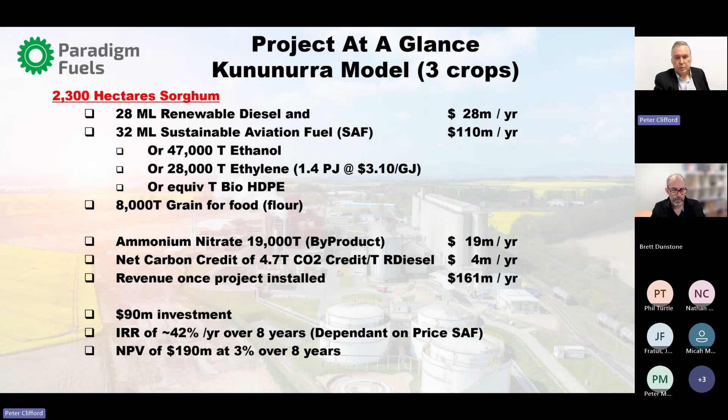Okay, to start the discussion on our technology, I first wanted to address the circularity of the system. First is the input into the system, which is the sorghum feedstock, having captured about 120 tonnes of carbon dioxide per hectare, a number that is based on molar balance calculations. And then there's the outputs, which are the ethanol products: ethylene, high-density polyethylene, sustainable aviation fuel, and/or renewable diesel. And then there's lipid oil products such as renewable diesel and sustainable aviation fuel, and digestion products such as nitrogen-rich digestate, which we bury below the crop, and ammonium nitrate fertiliser.

Now, the main process trains are the ethanol production, the lipid oil production, and the nitric acid production. I'll talk about these and other components such as the anaerobic digestion and power generation, and we'll reference this particular drawing. We'll keep coming back to this. But the main point is that no gases escape from this system. All carbon dioxide is captured, so as a minimum we have a carbon net zero operation.

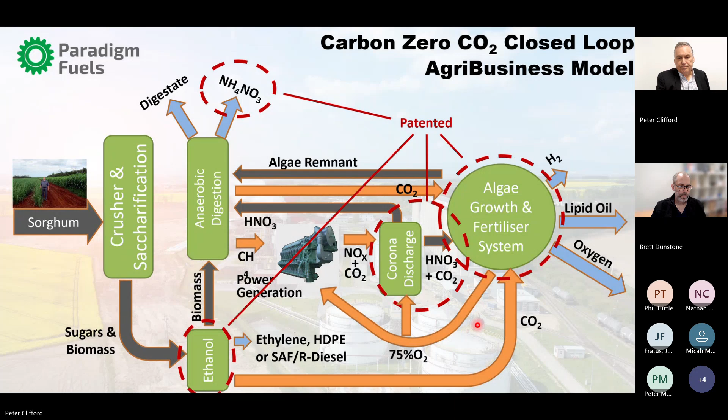But it's better than that. See, this diagram describes the one input and the three outputs of the process. The input is from the crop and the outputs into the ethanol product, in this case bio-HDPE, renewable diesel, and a digestate, which is then buried below the crop. The digestate is used as a feedstock for carbon farming and for the accumulation of Australian carbon credit units. In fact, 1/3 of the carbon that we capture from the sky ends up being buried below our sorghum crop.

The ethanol train can produce sustainable aviation fuel, as distinct from HDPE, which is slated as carbon net zero. But better still is that we require hundreds of thousands of tonnes of bio-HDPE for the construction of our algae growth system to produce large quantities of renewable diesel, but this also can be used to produce sustainable aviation fuel. And so there are two separate processes within our system that can be used to produce sustainable aviation fuel.

The 32 megalitres that I quoted in a previous slide is just from the ethanol train, but can be substantially more, 26 megalitres more, making the total SAF production 58 megalitres if we were to change the process parameters to produce SAF rather than renewable diesel through the hydrotreating process. Similarly, by extending the alkalization parameters, we can produce renewable diesel from the ethanol train.

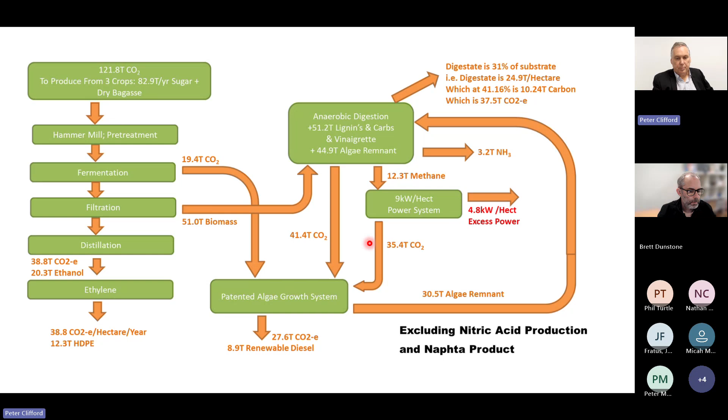So let's start talking about the components of the system. Our first process is the production of ethanol, going back to that drawing. Now, this is not new, but what is new is that we are using nitric acid generated within the system as a hydrolysis agent that upon completion of pre-treatment is then neutralized with ammonia to produce ammonium nitrate salt, which is later used as a fertiliser.

What we have is a hydrolysis process, which means we break apart the constituents of the biomass. In other words, we pre-treat the biomass to convert the starches to sugars, expose the hemicellulose and separate the cellulose from the lignins. So this we do in trenches, using much the same construction as our algae growth system, which I'll describe later.

But because of the significant throughput, about 1,000 tonnes per day, which includes a lot of water, and the fact that the entire pre-treatment and saccharification process is staggered over 6 days means that we require a lot of storage. So rather than utilising tanks, it is more affordable to use a variation of our algae system, being a trench, and all made from bio-HDPE, a product of our ethanol train.

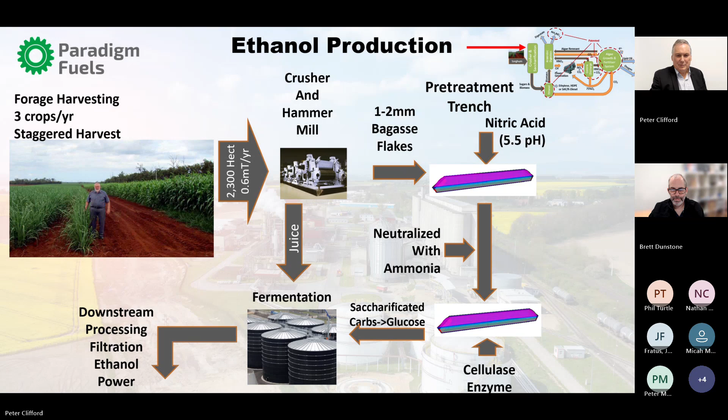Now, the anaerobic digester is a key component, and that's just there on that drawing, producing 4 useful products used within the system. There's the biomethane for gas engine power generation. There's the carbon dioxide, which is in abundance, and we use as an algae feedstock. There's ammonia for fertiliser, and there's the digestate, which is buried below the crop and sequestered for carbon credit.

For 2,300 hectares of crop, the anaerobic digester processes about 185,000 tonnes a year of biomass. And of that, there's 57,000 tonnes of cellulose, 49,000 tonnes of lignins, there's 11,000 tonnes of filtration remnant, but there's 68,000 tonnes of algae remnant, which contains more than 70% carbohydrate and protein. In fact, the protein alone will be about 70%. And then there is 10% nitrogen, and this remnant sits in a nitrate soup, a total of 185,000 tonnes per year of high quality feedstock to our anaerobic digester.

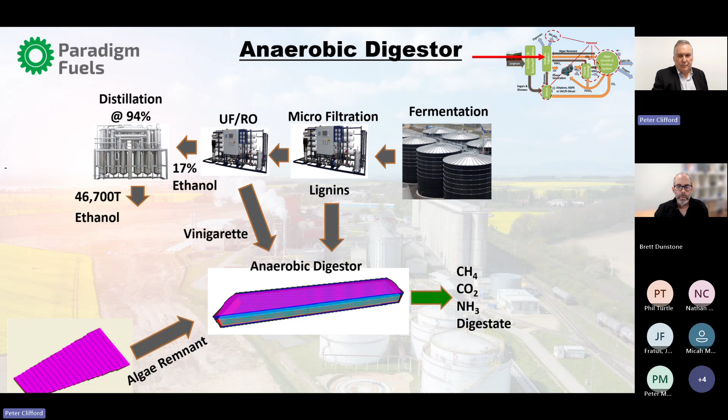Okay, one of the keys to affordably produce biofuel is to produce internally our own electrical power. Now, our process consumes 15 megawatts of power, and we have 16 megawatts of excess power available for other purposes. And at $100 per megawatt hour, the 2025 annual average wholesale price for New South Wales was $103 per megawatt hour, that is $13 million per year, which is 35 cents a litre for ethanol on top of other production costs. Now, we don't have to account for that 35 cents a litre because we are producing our own power.

If you were to compare against the old processes that don't include pre-treatment and saccharification, and which produce far less ethanol, then that power cost will be far greater than the 35 cents a litre. So whilst on the subject of cost saving, it is the production of our own fertiliser, which for sweet sorghum, our high biomass crop, having 2 to 3 times more biomass than that of sugarcane, is a significant cost.

So Sugar Research Australia examined the application of 140 kilograms of nitrogen per hectare near Mackay to produce 130 tonnes of sugarcane per hectare, and at $1,100 per tonne of urea and prorated by biomass, it's about another 4 cents a litre of ethanol in the cost to produce that product. And it can be much higher depending on a multitude of parameters. So I'll talk about our fertiliser production method shortly. And also we're producing twice as much power as we need, which allows us to consider desalination of water to enable 3 crops per year.

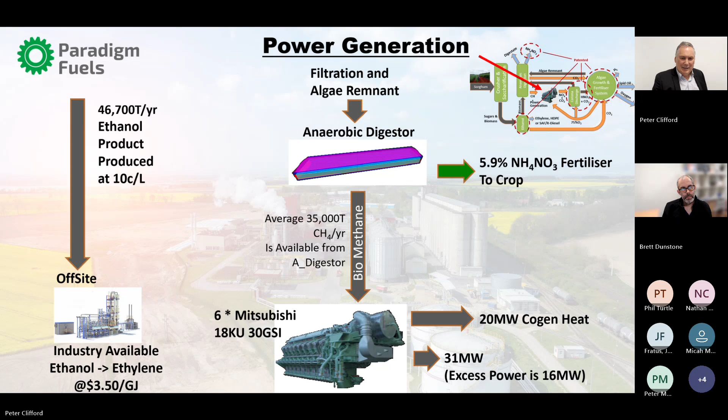And one thing our process does allow for is the constant feed of biomass material to the anaerobic digester, enabled by staggered harvesting. Better said, continuous harvesting, and a crop that only takes 120 days to grow. Though I haven't shown the accumulated gas flow generation, it is pretty much a straight line, meaning methane delivery to our gas generators is steady flow. That is very useful when considering production method and provides us with a range of production efficiencies when applied to other production components.

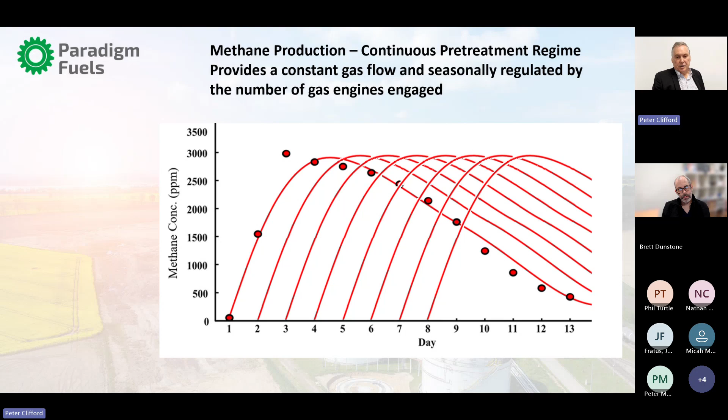The second process train is our algae growth system. And I mentioned earlier, we capture all carbon dioxide generated within the system. And for a 2,300 hectare crop, there's 58,000 tonnes of carbon dioxide produced by the fermentation process. There's 82,000 tonnes a year of carbon dioxide produced by the gas engine generators.

There's 95,000 tonnes of carbon dioxide produced by the anaerobic digester, and there's 31,000 tonnes a year of carbon dioxide produced by this NOx generator. In all, 266,000 tonnes a year of carbon dioxide, all fed into the algae growth system as its feedstock.

And we also produce 58,000 tonnes a year of nitric acid. A lot of that nitric acid is consumed by the algae, which is 7% by weight nitrogen. I mean, nitric acid is HNO3, H being the proton and NO3 being the nitrate. So it's the simplest form of nitrate.

Okay, so what happens as a result of this is that we end up with a high concentration of nitrogen in the feed of algae remnant to the anaerobic digester as digestible waste, which is a large portion of the digester's feedstock. So we fertilise this algae with nitric acid to obtain a pH of 5.5 to 6.5, in other words, mildly acidic, which also provides just enough stress to the algae to increase the lipid oil production.

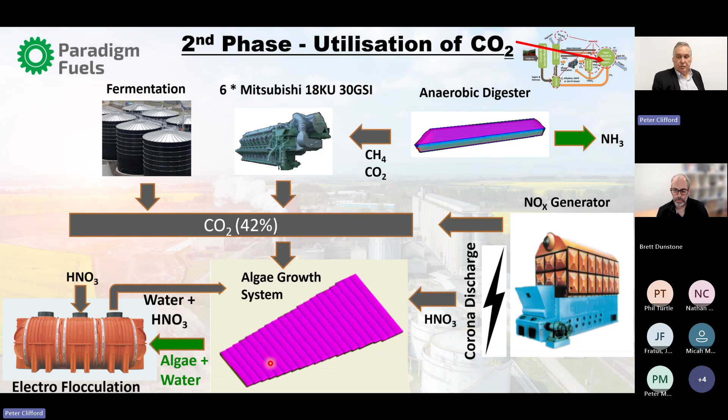So very shortly, I'll describe this algae growth system, which is the centerpiece of our second process train, the production of renewable diesel. But first, an explanation of our nitric acid production train. This is a cross-section of a furnace containing pressurized ducts. This furnace and the internal ducts are about 15 meters long, and the gases in the ducts contain a high concentration of oxygen, given that the algae growth system consumes carbon dioxide to produce a high concentration of oxygen, which we tap into.

So we mix that with air, which is 80% nitrogen. And so we have a high concentration of oxygen and nitrogen gas heated under pressure to generate NOx. Now, NOx describes a family of nitrogen oxides, NO, N2O, NO2, N2O3, N2O4, N2O5, but predominantly NO, one atom of nitrogen and one atom of oxygen. According to Bowman's theory, there's an estimation of the amount of nitrogen oxide that's generated as a function of time at the higher reaction temperature and at a concentration and pressure of the oxygen and nitrogen.

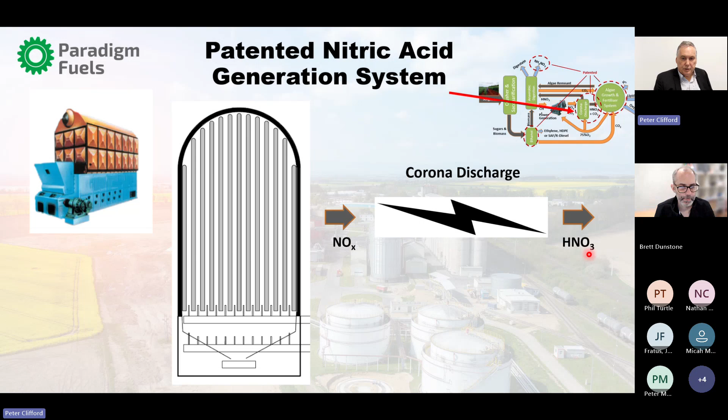We then saturate the NOx gases with water mist and pass them through a corona discharge device, which is a high voltage device that effectively ionizes the gases, much the same way as you would see around transmission lines on a misty night. The NOx converts to nitrous acid, and a benefit of its short half-life is that we end up with nitric acid. So we can produce the 58,000 tonnes of nitric acid per year that I mentioned in the previous slide.

And before I discuss the algae growth system, I should also mention that biodiesel is not renewable diesel. Biodiesel is a fatty acid methyl ester, which is not warranted for straight-up use by major engine manufacturers. But renewable diesel is warranted and is a paraffin, a very different type of fuel. So lipid oils are extracted from the algae, and they are processed into renewable diesel using hydrogen processing technology. It's called hydrotreating, and is widely used in oil refineries. So we can produce renewable diesel at around about 22 cents a litre Australian.

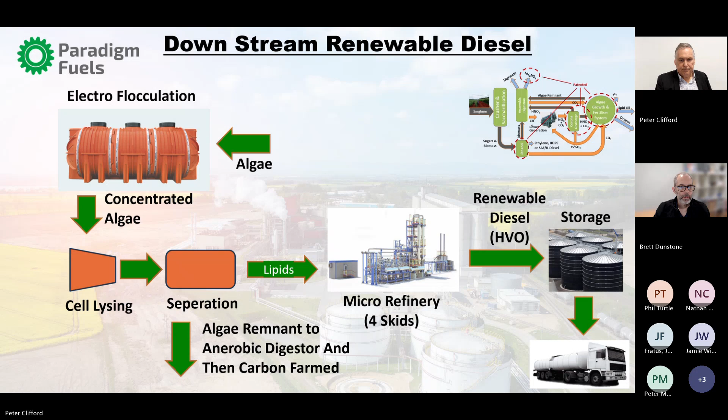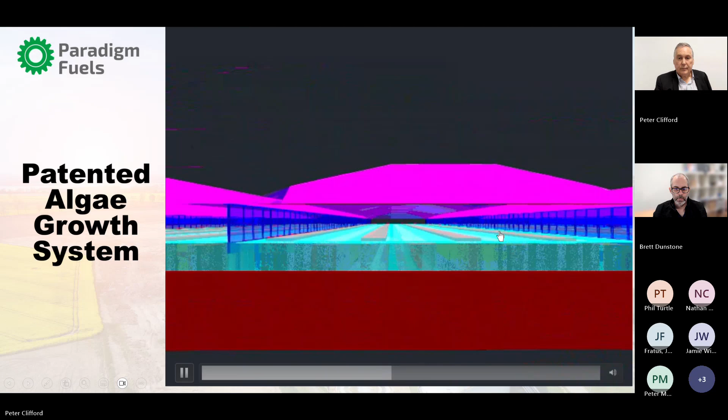So I just wanted to finish up with a couple of slides relating to our patented algae system. And the first one is a fly-through. We can see each of these panels is enclosed, creating a gas duct delivering carbon dioxide and capturing oxygen from each panel. So you can see the curtains on either side of a panel, directing that gas flow so the gases can then return back in the next panel and then down the next and back and down the next. Meanwhile, the algae medium is flowing from right to left.

So now, if I go back to full view, there you go. There's only about 15 centimetre head difference between the far right of the marquee to the far left of the marquee, substantiated by Manning's equation. So not much energy is required to operate one of these algae growth marquees, even though we are recirculating a lot of water.

Also, this design allows us to manage the nitrogen uptake of the algae with injection of nitric acid into panels as required, or alternatively in the far panels, deprive the algae of nitrogen to produce enough stress to increase the amount of lipid oil content in the algae, a well-researched production enhancement method.

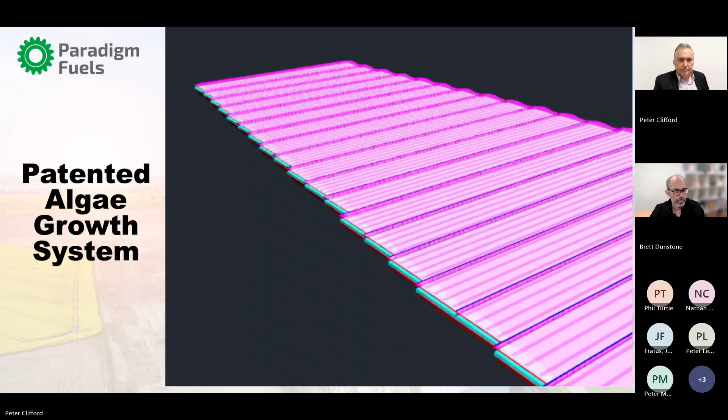Now, I just wanted to point out these light diffusion devices that capture surface light and deliver it deep into the panel. So the next slide shows the operation of these light diffusion devices. And these light diffusion devices are very interesting because they are separated by partitions, forcing the algae medium to travel up and over a partition, and then down the light diffusion device to then travel up the other side, capturing the light along its path. And this cycle is repeated as the algae medium flows from right to left.

Now, the light intensity in Northern Australia is 1700 micromoles of photons per square metre per second, whereas the optimum light intensity for algae is somewhere between 150 and 300 micromoles of photons per square metre per second, depending on the species of algae, which is 5 to 11 times less than what is applied from the sun. And thus, through this design, we can capture light and use it efficiently. We distribute that 1700 micromoles all the way down the light diffusion device.

Now, light diffusion devices overcome the limitation of the 7 centimetres of light penetration that would otherwise be the case at 1 gram of algae per litre, and also provide us with sufficient operating depth to maintain a constant temperature for the algae. So we're not reliant on the light striking the surface of the algae medium, as you see in many raceway systems.

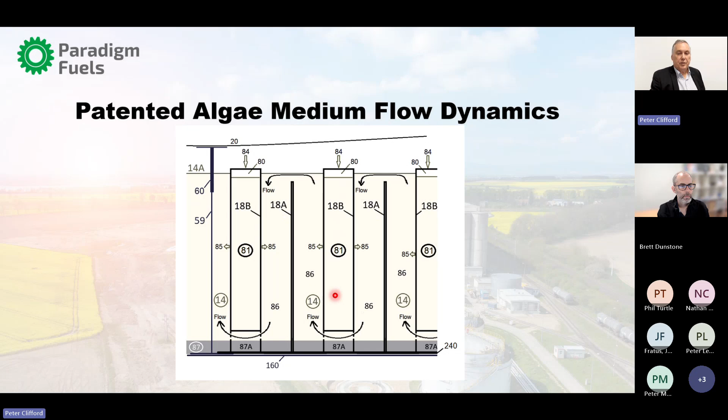Now, these light diffusion devices contain purified water with pink pigment to reflect light into the algae medium. So if they appear pink, they are reflecting light. And though it may seem obvious, the spacing between devices and the partitions is commensurate with the algae design concentration. So a panel looks like this in cross-section, where the algae medium travels from one side to the other and into the next panel. A typical marquee, which I've just shown you in that fly-through, may have 11 to 13 panels, after which the algae medium is extracted and processed.

Whereas the gases that travel down the gas duct must service the entire algae growth system, which provides about 1,000 kilometres of ducting in which the gases are travelling at only 11 metres an hour for a fully dimensioned algae system, which accommodates 2,300 hectares of crop. See, the algae system is a farm in its own right, as is the sorghum farm. So you've got the algae system and farm, and you've got the sorghum farm. In other words, two farms that coexist with a production operation in the middle.

And it's a closed system which allows us to manage, move, and utilise large volumes of gases. And then, of course, there's an efficient transfer of gases between the algae medium and the gas duct, relying on Henry's law through vertical water movement, up and down, up and down. I probably should also mention that we have a patented device that effectively scrapes the algae from the sides of the light diffusion device to keep it clean.

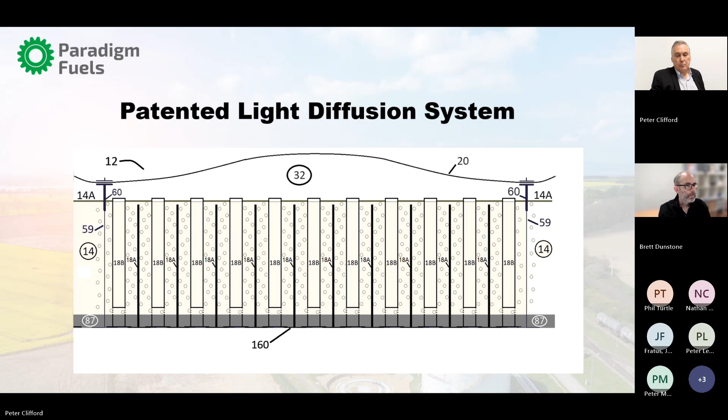Now, I mentioned earlier our preference to produce bio-HDPE from the ethanol process stream, because there's a lot of extruded components required in the system, all of which constitute a value-add product for the marketplace. For example, HDPE sheet for farmers, farmers' dams, construction, and for mining corporations. And these are just some examples that will cause a manufacturing industry to develop as a result of our need to produce these components.

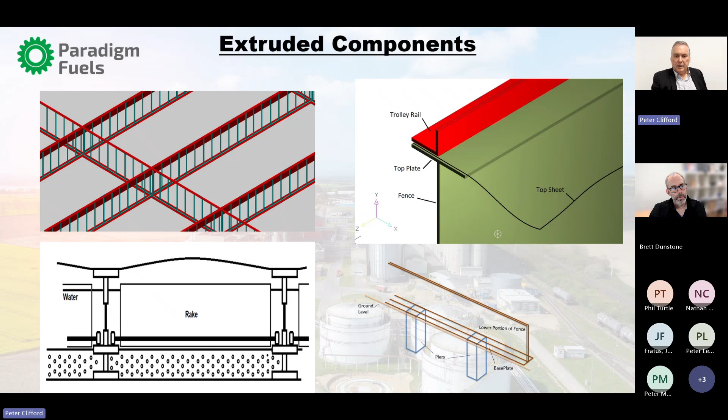As well as bio-HDPE, there's also a need to utilise bio-PET, that's polyethylene terephthalate, which is a clear plastic, good for light transmission, and which we can produce ourselves as well.

Now, it might be a good time to answer any questions.